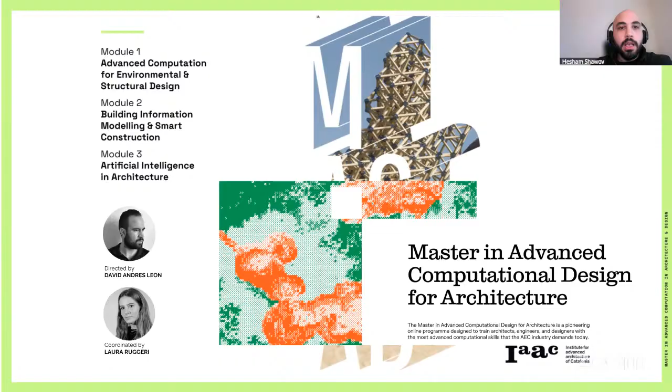Okay, about MACAD itself. So our seminar, the Complex Forming Seminar, is part of module 1 of MACAD. And there are 3 modules. The first module is focusing on advanced computation for environmental and structural design. The second module is focusing on building information modeling and smart construction. And the third module is focusing more on artificial intelligence. So I'm explaining this to you so you can understand where our course lies within the entire master's.

So our seminar is not the main studio. There is a main design studio where the students spend way more time, basically the full 8 weeks, to design the projects. However, in our case, because it's a supporting seminar, we spend the first 6 weeks with normal studies, taking assignments, but then the students spend the last 2 to 3 weeks developing these short projects. So that's something to keep in mind when giving feedback and looking at the projects, because they are very short term.

So this is where our seminar lies, and the other seminars in this module are the environmental and structural design theory, the digital tools for environmental analysis for architectural design, and the digital tools for structure optimization strategies, and our seminar, in addition to the studio, of course.

MACAD has a very interesting kind of format. There is the synchronous format and there is the asynchronous format, which means some of the students can actually attend the lectures in an asynchronous format, which means they only watch the recordings and they have separate live mentoring sessions to follow up on their progress.

So our seminar is focusing on Rhino, Grasshopper, and Python. So we try to introduce the students to computational design, the basics of computational design, focusing more on complex geometry, parametric design, and how they can actually document complex systems and computational design systems. Our sessions range from introduction to Python, mathematical surfaces, to form finding, to voxelization, to recursive geometries, swarming and noise, and also tessellation and tiling.

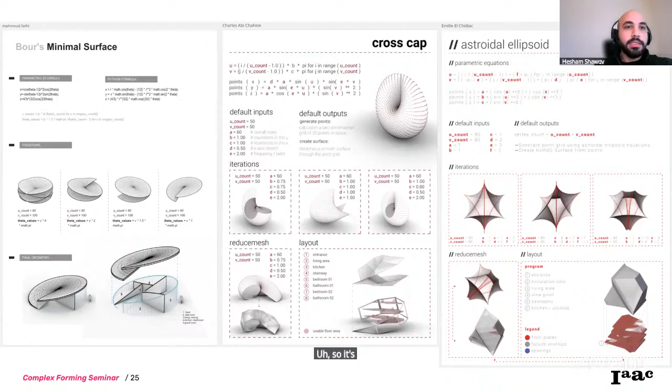So the first assignment is this one, which is the mathematical surface. So they actually study how they can build a mathematical surface using Python and Grasshopper, and how they can control the geometry in a way where they can use this as an envelope for a building typology like a house. And we work on a Miro board, so it's kind of an open format, everyone can see everybody else's work. So it's very interactive. And I'm just pulling a few examples. And I will also share an MVP, the best submission prize, for each assignment.

So for the first assignment, we had this great contribution from Charles, where he showed great control over the surface and also a very convincing method of converting this into a low poly geometry that could be used as an actual structure.

And moving to assignment number 2, focusing on playscapes and inspired by the playscape structure by Newhouse, and focusing more on form finding and tensile structures, where the students responded with their own work. So we give them more of an open brief, so they can respond in a more creative way to all these different parameters using the tools that we are teaching them on a weekly basis. And the MVP goes to Aditya for this assignment. Thanks for this as well.

He also showed how he could really control the attributes of these surfaces and the attributes of the mesh forces on many different levels, while also showing a great understanding of the documentation behind the process, which was really the main focus of the seminar, how you can actually document your process in the best way, regardless of the end product.

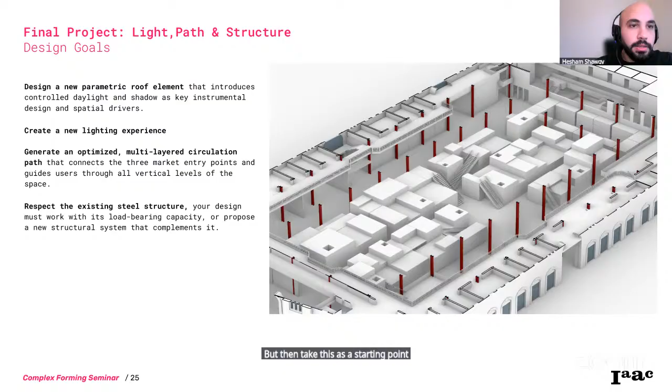So how they can design a new parametric roof element, how they can generate optimized multi-layered circulation paths, but also how they can respect the existing steel structure and the existing structure spans. As I mentioned, it's a very short project, so it's more about gathering their first impressions and their first responses as a computational design system to this existing building.

So if I look at this, I would say the main focus will be on the design system, the computational design methodology, the form finding process, and the design optioneering, more than, let's say, focusing on structure analysis, building materials, or optimization. So the last three domains are a little bit out of the scope, and they focus on structure analysis, for example, during other seminars within the masters. So this is also for our jury members to maybe set their expectations right when they look at all these different projects.

We have 24 presentations, so I'll try to wrap up this introduction now. Every student, it's an individual project. So every student will present their project for about 4 minutes, where they have around 9 to 12 slides. And we are going to have 6 clusters of 4 presentations. So we're going to run 4 presentations at a time, and then we're going to stop and open the window for the jury members to give their feedback for 10 to 15 minutes. Then we move to another one. So 6 groups of 4 presentations, followed by a 15-minute jury feedback.

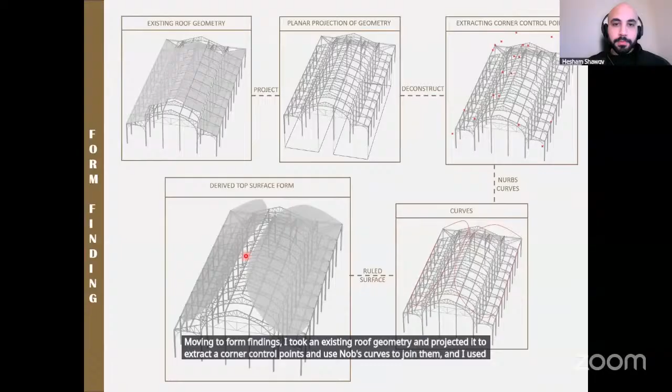the market. Moving to form finding, I took an existing roof geometry and projected it to extract corner control points and used NURBS curves to join them, and I used a ruled surface to derive the top surface form. For structural support, I took the derived surface form and extracted vertices out of it and then projected them to an existing structural roof and joined them using a pipe mesh to get a structural support for my derived surface. So here is the top layer and the bottom layer pattern.

So the top and bottom layers work together to filter sunlight, allowing soft natural light to enter while reducing the heat and creating a comfortable and dynamic shadow pattern inside the market.

So for my base roof layer, I took the corner points from the existing surface and converted them into a surface using 4-point surface and then converted into mesh using mesh surface and to tri-mesh and deconstructed it to get vertices for loading, and then used pull points to get supports at the corners, and then I used a bouncy solver to get the output mesh and then subdivided the mesh using a Weaverbird loop subdivision and then used a tangent circle to apply a pattern on it.

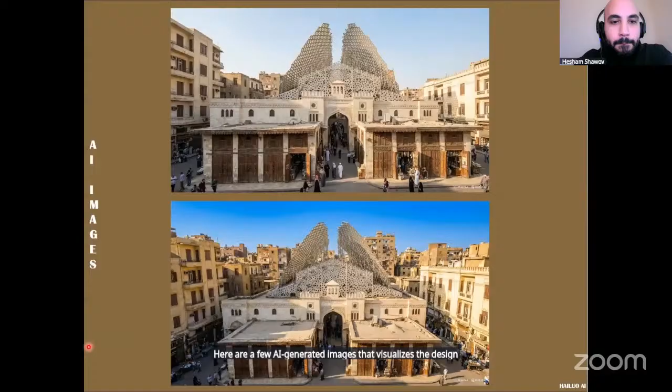So this shows that the design blends with the historic facade with a lightweight wing-like roof structure, creating a bright open public interior that transforms into an immersive illuminated courtyard at night. Here are a few AI-generated images that visualize the design in its real context. Here is a small walkthrough of my project.

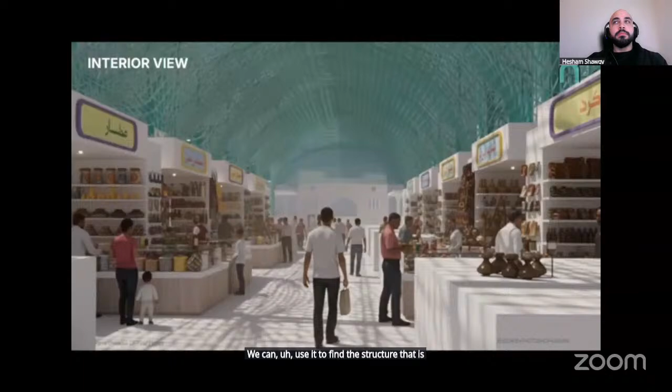So looking inside, the result is a bright, airy, and contemporary shopping experience. The new roof allows diffused light to flood the space, transforming the atmosphere. So the project demonstrates how computational design is not just about complex geometry, but we can also use it to find a structure that is both contemporary and sensitive to the existing classical architecture. We can protect the market's heritage while also securing its future as a vibrant, open, and inviting commercial heart for the community.

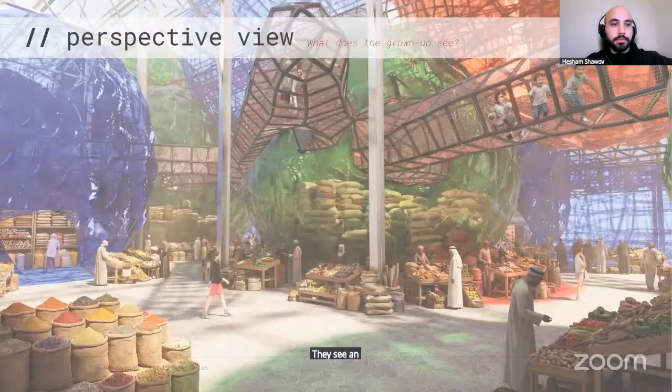At the urban scale, what does the bird see? It's a signal that something new is inflating inside the old shell. On the ground, what does the grown-up see? They see an atmospheric marketplace. The glitch becomes a lighting strategy. As the sun moves, the floor is painted with colored shadows. The most important question, what does the kid see? They see a wormhole. This is the spine. While the adults are shopping below, the kids are navigating a completely different world above. It's a hidden layer of the city just for them, suspended in a balloon network.

Finally, looking at the social logic, we didn't just place balloons randomly, we curated the flow. It organizes the chaos of the market into a functional ecosystem. So to wrap up, what do I want you to see? I want you to see a project that respects the void by filling it. It's balloons that hug the past and the people around.

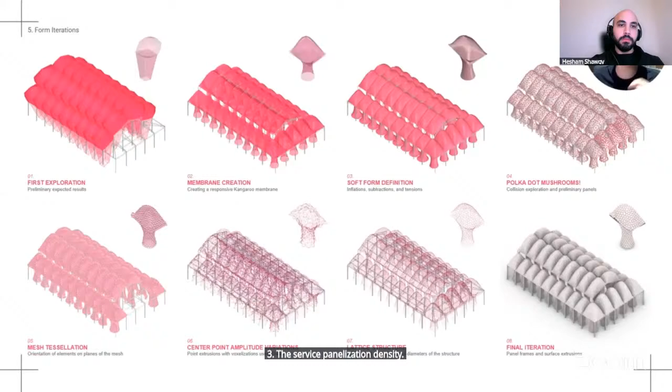The form-finding process was driven by a series of adjustable parameters, each one controlling four main aspects of the geometry. Number one, the structural descent of the columns. Two, the inflation of the upper domes. Three, the surface panelization density. And four, the inflation magnitude of the individual panels. Here you can see various iterations resulting from these parameters, taking into account key constraints and varying the final structural weights of the project.

In this way, the system revitalizes the decaying market. The intervention applies a new system directly into the pre-existing site, where the original structural grid serves as the foundation of the modern pneumatic transformation. From the exterior, the volumes appear as extrusions emerging from within, hinting at the commercial activities below. In the sections, we can observe corridors and shops nested within these extrusions, a design that allows diffuse light to penetrate deep into the space.

Here in the architectural plan, we can see that these volumes define internal organization, creating distinct commercial spaces and intuitive circulation paths. The upper faces inflate to provide shade and filter light, while the lower faces descend to sculpt intimate shop interiors. Ultimately, the pneumatic incrustation proves that we can revive neglected historical contexts not by replacing them, but by merging the rigid history with a new, soft, modular liveness.

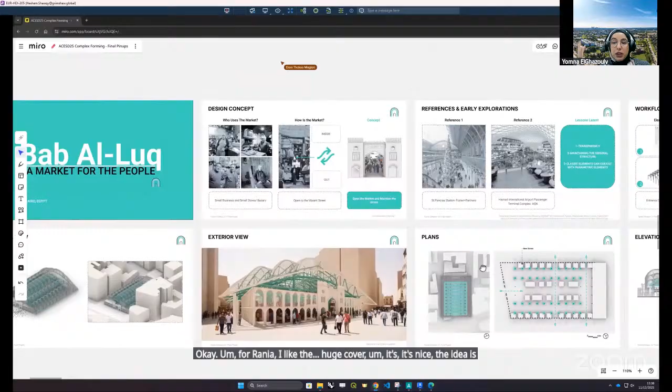Okay. For Rania, I like the huge cover. It's nice. The idea is nice. I appreciate the openness of it. However, I wonder if we could have made it more inspired by either the structure or the context, because I feel like there's a divide between the cover and those things. So I feel like the cover is a bit imposed on the form, but overall the form itself is very nice.

Emily, thank you for the project as well. It was very fun to see the different approach to that. And I like how you presented your process. It was very detailed. I wonder though if removing the whole building was the best approach. I would argue that maybe leaving specific elements in the building would have helped create this fluidity and void. I understand that she wanted to create an empty space, but maybe having these blobs intersect with the different elements would have been interesting, aside from the main structure, of course.

As for Ramon, I wonder if having these elements made the space less usable, because I feel like it took so much of the space. So as a further development to your process, maybe you could play a bit with the sizes and heights of your elements. That would create a more dynamic look to your design as well, and create more spaces. You'd be surprised by the in-between spaces that were created.

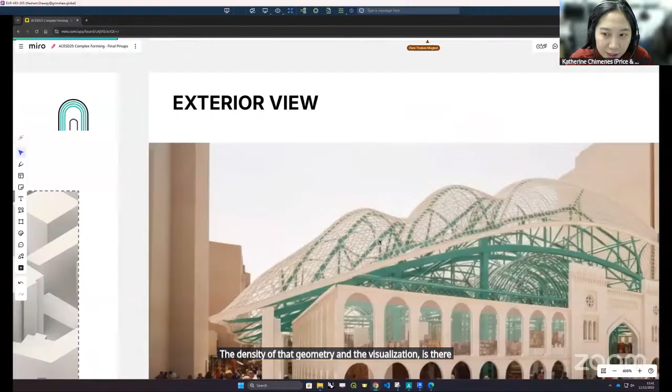Another thing as well is scale. In Rania's, for example, the tessellated shape in the renders looks like quite a tightly packed tessellated mesh. It would be interesting to understand the choice of that scale, how that responds to the density of that geometry and the visualization. Is there a potential for something less compact as well? Very often, structurally, we think about the connections. Connections mean lots more material. It's something worth revisiting. Also, the fact that there are two roofs for that proposal is a bit redundant because you have three shapes.

Also, very often with form-found, dynamically relaxed surfaces, so Rania and Sushmita, one thing that's quite interesting structurally is that these shapes, shell-formed, dynamically relaxed form-found shapes, can work very efficiently as shells independently. So they're inherently very good structurally. It's nice to think about how to make use of that and remove any secondary support structure. That would be quite nice to explore.

For Emily's one, I like the fun functionality of that proposal. I think it's very creative, the colors, the way of using a variety of computational design methods to actually create this structure. Actually, it reminds me of a Mona Hatoum sculpture where she has rebar cages with glass blobs, which is kind of nice.

One comment structurally is that you have these quadrilateral steel frames. Structurally, these quadrilateral shapes don't work as well because you often require stiffer connections. That's very often why, when you look at meshes in structure, you see triangulated meshes. It's about the inherent stability of not having to deal with connections taking moment forces. So it would help with your structure and potentially refine the size of the elements.

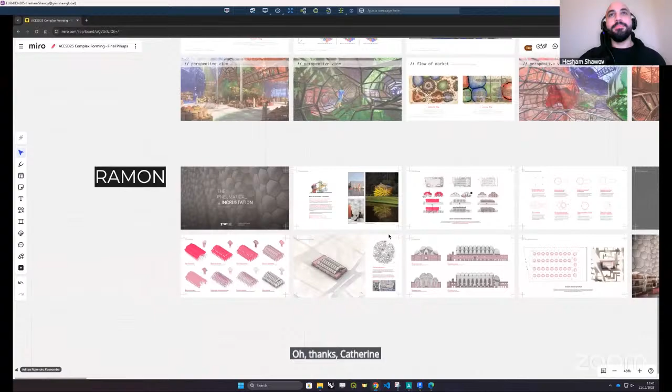Thanks, Katherine. Yeah, I think you covered a lot, both you and Yomna, but I would also like to hear if Anuj, Ines, and Ray would like to add anything. Yeah, maybe if I may, I will quickly jump in. Go for it, Andrew.

Thank you, Anush. Firstly, I want to comment quickly on the nature of the assignment, the brief. I think it's a very interesting one because it's one of the hardest things to design a harmonic dialogue between old and new. So repurposing and reconverting an old market like the Bab Al-Luq, I think it's a great design challenge and objective, and it's very easy for any designer to try to steal the show and erect this massive roof that doesn't respect the heritage and the history.

So I'm in Barcelona right now, and every morning I pass by Mercado Santa Caterina, which is a beautiful example of something similar, where you have a classical facade and actually a very similar structure of a market, but it has this incredible roof structure that goes over the top. These kinds of examples of architecture that have this dialogue of old and new are just really interesting to look at. I'll quickly go over some points.

The first presentation by Sushmita was very interesting. It made me think of another structure we have here in Barcelona by Frank Gehry, the whale. This is the kind of thing I was imagining with this shadow game from all the light bleeding through these little, I presume metal, some aluminum layers. Quite interesting. The second project I liked quite a lot. I especially love the fact that the truss and the facade have been preserved to some extent. I agree with Katherine that it does feel a bit bulky and seems almost unnecessary. However, I do like that it creates a ventilated tunnel.

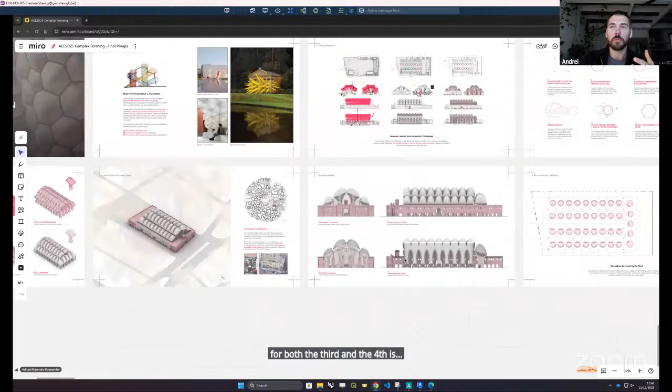Lastly, the fourth project, also very lovely. The comment I have for both the third and the fourth is that the whole thing, at least the way I understand pneumatic architecture, is to keep things light. But the way it feels here is that you're taking pneumatic architecture and making it so bulky that it occupies so much of the floor space.

And the floor space at a market is pivotal for any businessman, from economics to spatial syntax. I actually like the contrast that we've seen, because in the fourth one, Ramon shows very organized lanes of stalls, and that works in many ways for a market, and many markets historically are designed like this, where firstly this allows for ventilation to come through, and then you don't get lost.

With Emily, I feel, for example, with the population of these bubbles, firstly the market becomes a bit of a maze, which is tricky in itself to navigate through. And then a market is a space that is an internal shell, but the inside should be constantly changing or evolving over time. So this modularity to rearrange the stalls, to rearrange the businesses is important.

And this is where the less you allocate of a space for structural support for a roof, for example, the better. So that's just something to consider. But all projects are very interesting, and the logic of arriving to the form finding is also quite fascinating. I'm really enjoying your feedback.

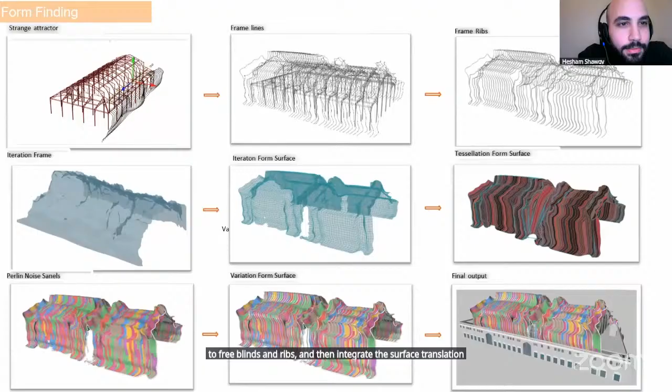Form finding: this shows from the strange attractor, frame to frame lines and the ribs, and then integrating the surface, tessellation, Perlin noise, the panel variation, the surface, and the colorful final output. It's about experimenting to evolve from rigid to organic geometry.

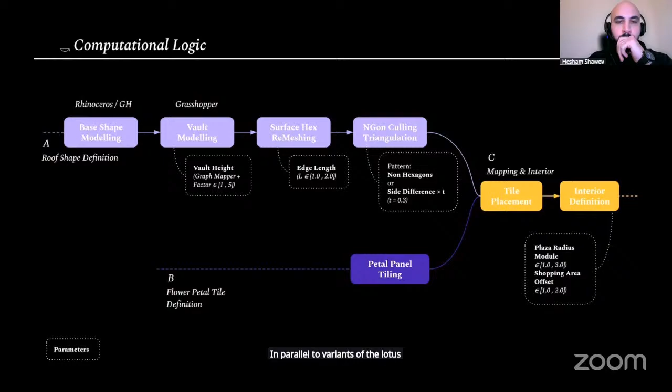From the computational perspective, the development follows three main steps. First, the simplified roof volume is modeled and used as the base for generating the lateral vaults. These vaults are then remeshed into a predominantly hexagonal mesh, onto which a triangulation logic is applied. In parallel, two variants of the lotus tile, one representing flowers and another representing leaves, are designed. These parallel processes meet in the placement stage, from which the logic for the interior pathways and layout is extracted.

Although the malkaf served as a conceptual anchor from the beginning, the roof shape evolved through several iterations before arriving at its final form. It began as flat planes derived from a standard malkaf profile, then shifted to rectangular openings, and later to catenary vaults generated through Kangaroo. Ultimately, the geometry was distilled into triangular vaults directly related to the structural modules of the existing market.

In this final iteration, the vaults are aligned with the structural grid and controlled by a consistent height factor. Their variation across the roof is managed through a graph mapper, allowing differentiation along the longitudinal axis. Additional structure is introduced along the vault edges and linked back to the existing trusses, and the surfaces are meshed with a target edge length to produce an n-gon-based mesh.

Once this base meshing is set, the lotus tiles are applied. A triangulation logic is used to determine where leaf tiles or flower tiles should be placed. Faces that are non-hexagonal, such as pentagons or heptagons, are triangulated, as are hexagons that exceed a user-defined tolerance for edge length irregularity. These triangular faces receive the leaf and stem tiles, while the remaining true hexagons host the flower tiles.

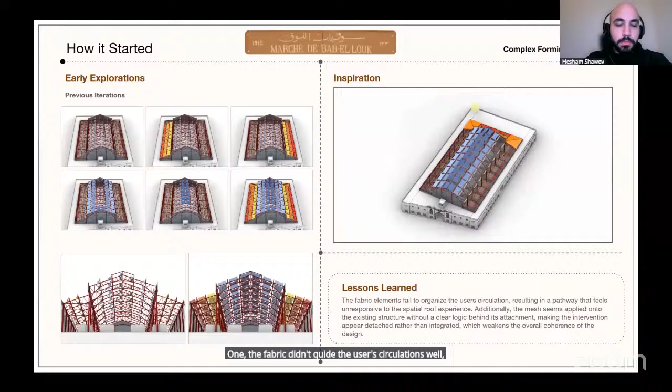In the beginning, I experimented with a tensile fabric that moved with the sun path, but I encountered two main issues. One, the fabric didn't guide the user's circulation well, and two, it felt a bit forced onto the existing structure rather than integrated. So I adjusted my approach, and here I'm going to talk about the computational design methodology.

I started by extracting the structure's outline and creating meshes. I defined load points influenced by a curved path, so the closer the points are, the more the mesh pulls downwards to guide circulation. Using Kangaroo for mesh relaxation, I got the final form. Then I applied color variation based on the Z direction, making the panels darker as they dipped lower, and used Weaverbird to echo the color patterns of traditional markets.

Finally, I arranged a series of shops and culled the ones touching the path using points and curve to open the circulation route.

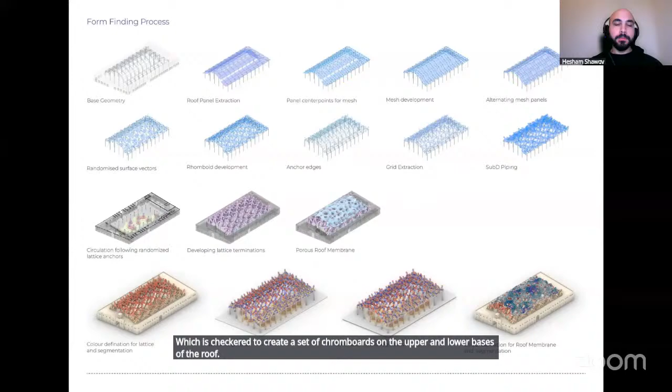The form-finding process uses the roof paneling extracted from given geometry using the centroids of the panel to build a separate mesh, which is checkered to create a set of rhomboids on the upper and lower faces of the roof. An extra set of randomized anchors are created to create a termination point both as ground anchors for vendor stall generation and separately as anchors for the roof membrane.

This is followed by SubD piping and inflating the final grid, which is segmented, then developed as strips, then colored following the positive Z direction. The next step involves using base geometry of the upper nodes to develop a mesh membrane with multiple randomization options, which is similarly developed as strips, colored with gradient variations, and processed to develop required porosity.

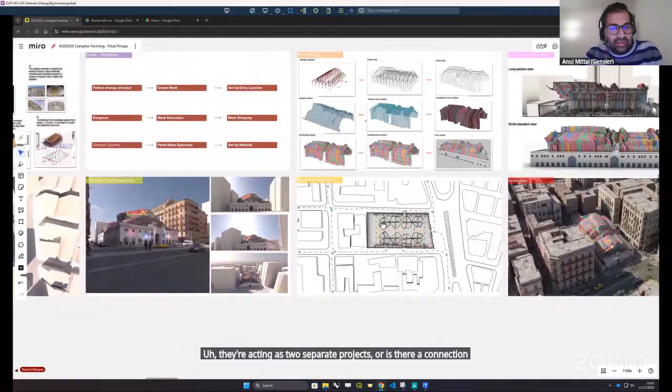And the other bit which I have a slight confusion with is what you're doing in the inside space and the outside space. Are they acting as two separate projects, or is there a connection between the inside and outside somehow? I love the colors, but I'm slightly skeptical of how they are connected to each other as well as the existing structure.

With the second project, I think that's Maria's project. I think I love the concept of using the catenary walls, and then the second bit, which is the pattern generation for the flowers and the leaves. I also love how it's very well developed, and you can see a lot of iterations that are done. And if I just talk about the computational strategies in place, I think it's a nicely developed project.

I especially love how you're able to articulate your flowers and leaves separately from hexagons to the n-gon meshes, and you're able to play with different strategies of patterns and how it reflects in the interior view. I think I loved that about this project.

For the next project, again, the concept of tensile and fabrics, I think I love it. I like that you are paying respect to the culture and how you want to adapt the colors and the hanging cloths, which I can see in your images as well. When you were explaining the project, somehow it struck me that you were trying something which I think is done by Studio Fuksas, how you would have these vortex coming in. I thought that's where it's going, but then it changed slightly into more about hanging the textiles.

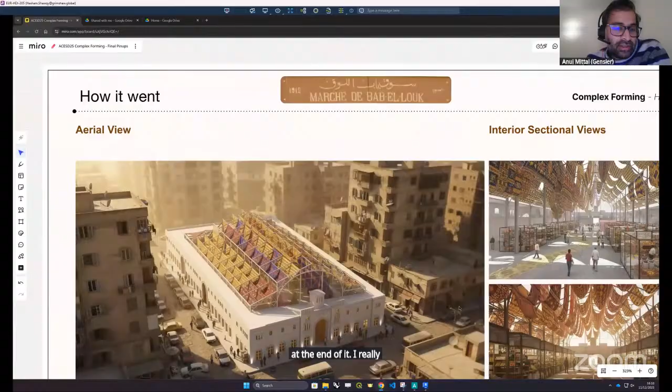So at least when you were trying to explain, my brain went in a different direction, and then the result was drastically different than what I was anticipating. I really appreciate that you were trying to do some shading analysis and figure out what's happening. My only question would be: are you doing these kind of simulations or analysis for the whole year? And is it responding to that? I mean, it's a complex topic, and I appreciate that the time's less, but just a few questions.

And then the last one, the balloons one. Again, I think I like the storytelling of the project and what was tried, and computationally speaking, it looks quite developed as well. The storytelling could be slightly better in this project, but computational technique-wise, I think it's nicely developed. And I love the fact that everybody's using AI, right? Because even in the professional world, it's taken over the world, so it's nice.

We try to limit the use of AI in coding because we use Python as well, as much as possible. So we try to at least make them use it as a tool that they can learn from, not as a copy paste sometimes. But anyway, it is what it is. At least we don't have AI voiceovers yet in the presentations.

So Ines, thanks so much, Anuj, for the feedback. Thank you. So thanks everyone for all the presentations, also the other four. It's crazy to think that this has been developed in 3 weeks and some of you were new to computational design, so congratulations to everyone. It has been great to go into all of them. I'll give a few comments on the first two, and if anyone of the jury feels like joining or adding something, please feel free to jump in.

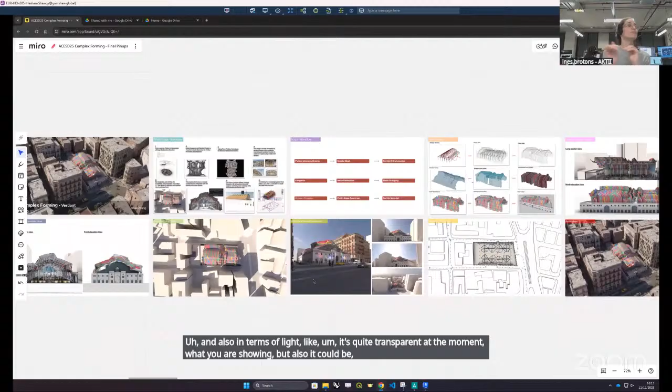And also in terms of light, it's quite transparent at the moment what you were showing, but some bits of the sections, or the transitions in between sections that are covered, could also be thought of as more translucent. I think that would be a bit more of a game or interaction with what's going on inside. But overall, as a logic and application, I think it respects the existing a lot, and I enjoyed it a lot. So congratulations.

If we go to the second project of Maria. So first, congratulations for the neat and clean explanation, workflow and articulation of the project. And again, crazy to think that this has been developed in 3 weeks. So that was very easy to follow, and as said, very neat.

If we could continue this project, I'd be very curious about taking a step further once you have your tiles and your tessellation, which is a great job in the last iteration, where you see that the roof shape is almost some flat surfaces joined together. Then there's an opportunity of trying to implement a single standard sizing of tiles. That would be amazing to think about.

Could we describe this roof, given that it's a set of flat surfaces that are joined, as we've been doing years and years ago, having just 3 or 4 types and then creating amazing patterns and shapes? Could that happen in terms of fabrication or simplification? That's a question I'm throwing here, and it will be quite complex, but it could be very nice as a further exploration.

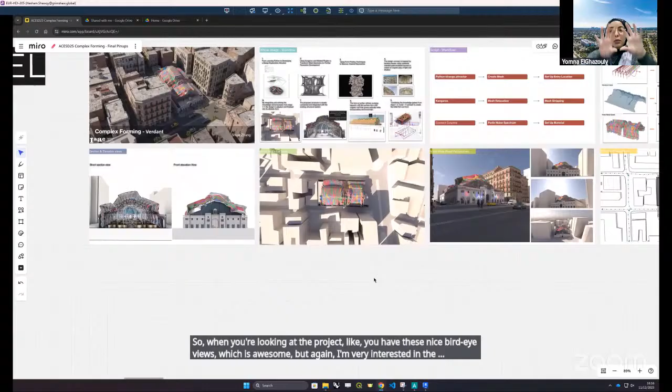So for the first project, thank you, Daniel. It was a very nice inspiration. However, I have 2 comments. When you're looking at the project, you have these nice bird's eye views, which is awesome. But I'm very interested in the experience when you go a bit down, because the area around the market is very, very tight. So you cannot actually experience this fluidity of the project.

So I feel like you meant to have a free roof, yet you ended up being confined by the edges, and you had to have a specific viewpoint to experience the whole thing. If you want to expand it more, maybe you should play around with the structure, take things out of their confined space, to make sure that from different points you can actually experience these angles. So that's nice.

Maria, thank you for your nice and clean project. My comment is: nice, clean, needs a bit more aggression, I would say. I feel like your project is a bit on the conservative side. You could have experimented more, especially since in your first iterations there were things intersecting with the main structure, and these masses could have been more aggressive and you could have played more with them.

And I would say mind the resultant silhouette, because there's an image where you can see the front, and then the silhouette, and the silhouette looks distorted. So it's more like distortion rather than masses playing together. For the third project, Henny, thank you for the lightness of the project. I really appreciate that.

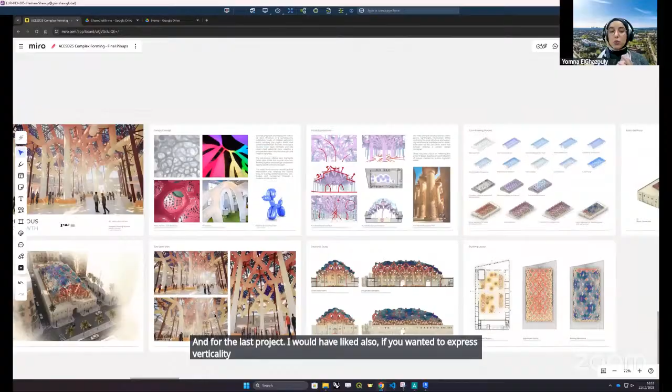And for the last project, you wanted to express verticality. So I would suggest, how about you play with perspective as well? Maybe making things more slender as you go, so you would actually focus more on the verticality of the space. Because if we experienced it with the human eye, it wouldn't be as grandiose as you think. But overall, awesome projects, you guys.

Thank you. Amazing, Yomna. Andre, Catherine, would you like to add anything? We still have 2 minutes. I'm happy to go. Yeah, go ahead.

So with Daniel's, I actually quite liked it from the design control aspect, because it was the right balance between following the rhythm of the existing structure, but adding something a bit different. What I liked is that it felt really thought through, your idea and your shape, that you had a vision and tried to find the right tools to replicate it. Very often in parametric design, the issue I have is that you see the tool by looking at the product, whereas here it feels like the idea came first, the draping and the shape, and then you used the tools to create that. So I quite like that aspect.

And structurally, it makes sense how you would attach it to the existing trusses with those arms. Sure, it needs some refinement structurally, but from a rationale, the way you've connected them to where you have the posts from the trusses makes a lot of sense. So I think it's actually quite a nice thing. There's of course some refinement to be done on the interfacing and how it interacts at the edges of the buildings, but I quite like what you've produced there.

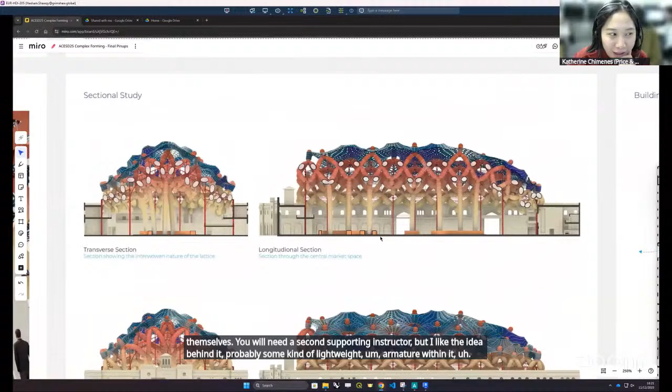Okay. And Aditya, sadly, your inflatable columns will not be able to stand by themselves. You would need a second supporting structure. But I like the idea behind it. Probably some kind of lightweight armature within it, like a steel and aluminum frame, would help it work. You have to have that as a self-supporting structure, and you have to think about air and how to keep it in.

I'll leave it to Andre. Actually, it's interesting in this project because you can think that the roof is actually the structure carrying the columns, right? Because the roof is supported on the existing structure, so maybe it's the other way around in this case. Exactly. Because of the geometry of the roof, you might hang the inflatables, fake them as columns. Instead of inflatables, they would just be fabric, tensioned to create the shapes you want. They'd be fake columns, but that would work, and they're very lightweight, so that's quite interesting to explore.

It's the first time for us as well to see so many things today, so I'm kind of jealous that I can't participate as much. But Andre, final comments. 1 minute, sorry. I mean, we're 2 minutes behind, so I think everything has been said.

Great projects. I think strong computational development. Some of them are very wild, like Aditya. You slapped a kraken on top of a market.

An important point that has been raised earlier is the ventilation, and this is something that's due to the material and the structural nature we are not focusing on, but it's just something to consider because in a hot place like Cairo, the heat is going to bring up all the smell upwards, and it needs some place to escape. And materiality is another factor that we're not focusing on, but it's also quite important to consider.

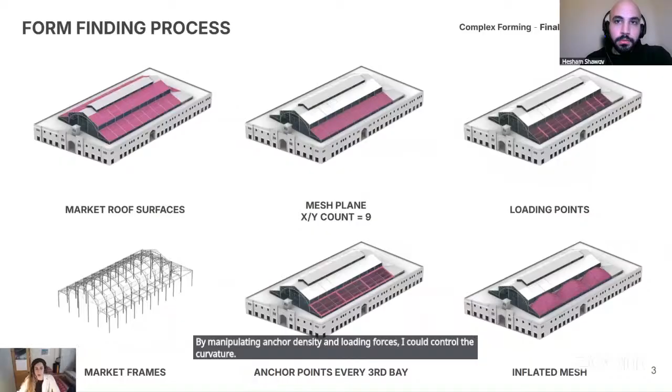Using Grasshopper, I built a workflow where a flat mesh is inflated and anchored along specific bays. Then the mesh is triangulated in the post-processing. Then, finally, I created a system for open versus closed mesh panels to control the light inside the market. By manipulating anchor density and loading forces, I could control the curvature. This workflow allowed the form to evolve naturally based on both structural and daylight intentions, which became the main influence in the project.

Through several iterations, I compared different meshes as well as void and solid panel configurations. Each option produced different patterns of light and shadow inside the market. Here we can see how the new roof system sits within the existing steel frames. The exploded view illustrates the relationship between old and new. The new pipe structure follows the curvature of the roof, and each pipe connects back to the existing steel frames through a secondary network of smaller connector pipes.

To understand how the roof performs throughout the day, I studied the sunlight from 6 a.m. to 6 p.m. The results show clear patterns. The east side is brightest in the morning, the center dominant at noon, and the west side lightens up in the afternoon. These changing conditions became the key generator for the internal zoning and circulation strategy.

Based on the sunlight behavior, in the morning, the east side receives strong direct light, which is ideal for produce, flowers, and breakfast-related vendors. At noon, the central spine becomes the brightest area, so I placed more active, high-visibility programs there, such as prepared food and artisan stalls. In the afternoon, the west warms up with a slower, softer light, which suits textile, ceramics, and other things. Circulation naturally follows these lighting shifts. People tend to move towards the brightest zone at each moment of the day, creating a continuous loop through the market.

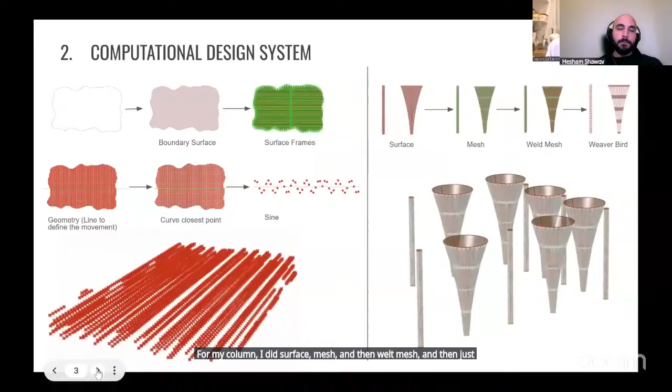My idea is to create a parametric canopy that will support a sine curve or a honeycomb waffle wooden panels to lure the light inside the structure. And for my first computational design system, as I did my sine roof, I created a boundary surface and then did surface frames, create a geometry line to define the movement, and then curve closest point, and then do the sine graph, and then extrude it, X, unit Z, and then for my column, I did surface, mesh, and then weld mesh, and then just Weaverbird, a simple geometry.

This is my first form finding iteration. I realized that the roof and the columns don't really connect, and I lose a lot of control over the sine wave logic. And then there is weird ending and weird opening that was created, and there is no connection between the integrated structure with the existing structure that I'm having now. So, and also this roof doesn't show how it connects and how it will work realistically. That's when I did another form finding process that leads to my final design of the canopy.

So I found this because of the lecture that Hesham showed how we use our geometry and then project it into the structure that we want. So I'm using here hexagon and then cull index, creating an opening and then project it onto my geometry. So this is the exploded diagram of how it will support the sine curved roof panels with slot and connections, and then structural waffle grid canopy, and then the parametric canopy that will support it.

And then I placed the canopy together so it can support my sine roof structure, but then I haven't worked on that, so it still has no control over ending and connecting points. And the new structure, it's weirdly higher than the existing structure, and it's not considering the overall context. That's when I did another form finding process and finalized my sine curved roof panels.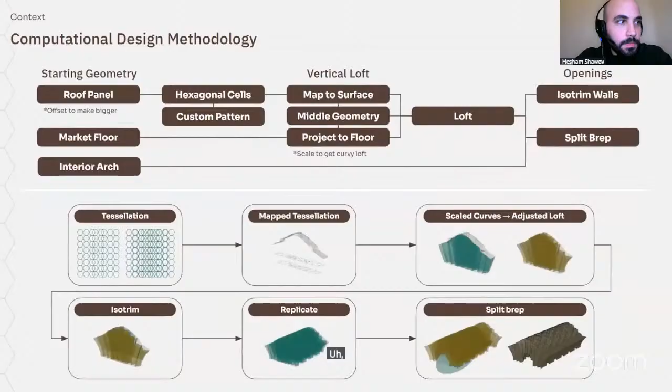And then in phase 3, I started developing a tessellated pattern system through loft workflow and Boolean operations. Thinking of it in parts, I found that one partition of the structure can be replicated to minimize calculation times. And from there are 3 main parts of the workflow: the tessellation, the loft, and adding the openings through isotrims and B-rep splits. For the tessellation, I tried repeating polygons, which looked a little too much, so I quickly decided to go with hexagons, and then scaling and duplicating to achieve those unique intersections.

The loft process was also really fun. Mapping the tessellation onto the roof, then lofting gives interesting lofts when each part is scaled. And then, of course, I was able to subtract with another form for the main entrance. I decided to go with a shape derived from the original structure's arch. Here are some iterations where I looked for a shape that is balanced and allowed for workable spaces. And from there, we see how at the ground floor, the hexagons offer ample space for vendor stalls.

Hexagonal grid organizes the vendor stalls and circulation, channeling visitors through compressed entrances before releasing them into the central gathering space. The section reveals the vertical journey with tessellated structures creating varying enclosure levels and central voids acting as light wells and ventilation chimneys. These views capture the experience of intimate shopping and filtered light, transitioning to dramatic vertical spaces that provide relief and orientation.

And so the Faraj Bajida market transforms throughout the day with shifting light patterns, animating the courtyards and creating unique experiences from morning to evening with the promise of relief after hardship. Thank you.

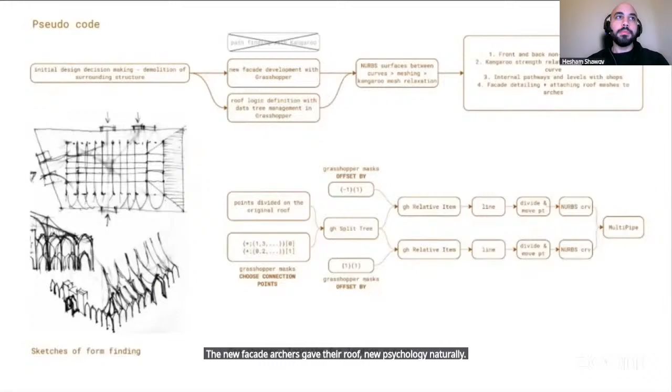In terms of the computational logic, I looked into masks in Grasshopper as the fastest way of managing multiple complicated curves connections. Here is a step-by-step form finding on one of the modular bays. Using the guiding horizontal lines along the existing structure, they were divided into the number of points which matches with the structure itself. By using split tree with masks to choose which point to connect to which, then offsetting point connections vertically with relative item, the lines are formed between the chosen vertices and are then turned into NURBS curves for greater control. The lines are then lofted horizontally and loft surfaces divided and joined vertically instead.

Then on the vertical surfaces mesh relaxation was applied. The strength of how much the mesh is relaxed depends on its proximity to the pathways on the ground floor. Lastly, the roof is added on top to cover the space from above. The relaxed meshes are hung to the bottom of existing structure, while the lofted surfaces are sitting on top of it to protect it from elements. This way, a series of interchanging checkerboard-like meshes is produced, which creates an interesting effect, impacting the light and shadows in a unique way, but still keeping the existing structure visible.

Here on the following slides, we'll see the floor plans of the ground floor, first floor, and the roof. The main takeaways of this project are the importance of proper mesh optimization and how strongly it influences the final geometry, the need to resolve internal spatial logic more, including levels, stairs, and circulation, and strategies for making non-typical geometries more parametrically manageable and adaptable. And on the last slide, you see some Twinmotion light studies together with Nano Banana Leonardo AI image showing the whole market and its surroundings.

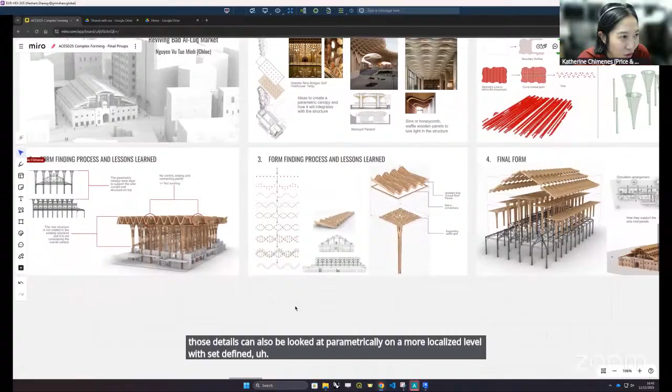And I think those details can also be looked at parametrically at a more localized level with set defined boundary constraints. So if you have interesting constraints that you want to inform differently, you can also come up with quite interesting different connection details, or alternatively find a way to tackle both structures jointly. So having that holistic approach of trying to solve geometry is also important in that sense.

If we go back to the other projects, I think Eleni's one was quite nice with the shape. It's like a tensile membrane, which is very lightweight and usually quite interesting structurally. So you have a very coherent structural approach here, and that would work quite nicely and respond as well to the grid of the trusses.

We then have Chloe and then Lakshmi and then Marina at the end. Great, thanks. I'm sharing my screen, by the way, if you didn't notice. Yeah. So for Marina's one, I think it's also very nicely done. The surface is porous and like a mesh. It would be interesting to think about how to have something more solid to make use of that curvature, because once again, curves are really good as inherent structural shells.

So by doing that, you can think about how that could integrate, but at the same time, you have a different purpose here in terms of what you're trying to create with the shading and the fabric. I quite like how your frame responds to it. So it's a matter of wondering if you want to have the inherent shading structure and the structure that holds itself up, or you want to separate it out into components. But I think I'll let other people comment on the other works.

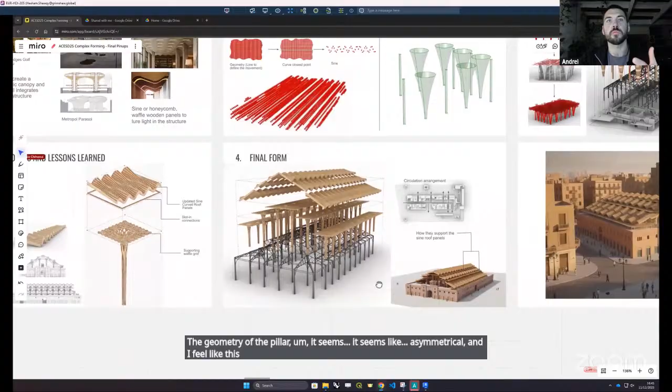asymmetrical, and I feel like this is where symmetry would work very nicely, because you were following this sort of Calatrava superpositioning of elements, which I love. So I would have loved to see that. I love also your decision to get inspired by the Ruffles chips. Anytime you have corrugated roofing, it just works well for rain or for any other runoff to go off.

And I also like this project and the first one, because they are explorations of roofs essentially. The first one, actually, I really want to come back and just clarify something. I really enjoyed the circulation of light explanation. However, I'm a bit confused by the types of shops and the times of the day. Like, did you have in mind that the shops change throughout the day? I wasn't really clear on that. Say the fruits in the morning and the clothing in the afternoon.

Can I respond? Sorry. Yeah, of course you can.

Yeah, the idea is to have morning related, as I said, vegetables and fruits in the morning, and when the light gets warmer, the ceramics and textiles throughout the afternoon to have warmer light on it. Okay, but would the vendors be rotating? No, there would always be a location. I think the purpose of this study is to have clusters of different zones which can inform how to relocate or create the positions for the different types of vendors or shops under the roof. Understood. Thank you for clearing that up.

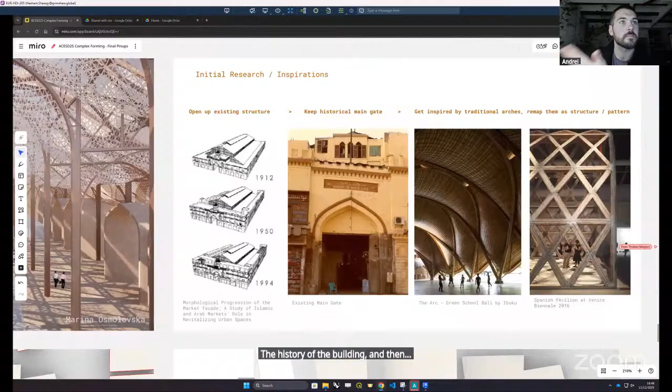The last project of Marina, I really like, firstly, that you showed us the history of the building, the way it looked in 1912, 1950, 1994. That gave me a lot more understanding of the history of the building. And it's an important thing to consider what you're taking out and what you're keeping. I also like your meshing system.

I'm just gonna say that those nets are a double-edged sword because they look lovely, but it's the perfect thing to trap a dead bird, and that's something we must be considering because birds and pigeons are the number one terrorists at any market of that size in the city. So this is just something to keep in mind, how the roof is gonna take life over time. Very interesting projects. Congratulations, Tiger.

Thanks, Andrei. Thanks so much. Ness, would you like to go next? Thank you. So thank you for all the presentations.

I'd like to highlight from Eleni's project. I enjoyed the fact that the computational design of the roof was led by the functionality, matching how light interacts with the functionality of the market within the design. That is very nice, and also the graphics and explanation were very clear.

I would wonder, because with the same computational design method or the bulbs that are generated, we are having different patterns in terms of transparency and opacity, so that it gives different outputs in the interior. It may be also interesting to explore this in terms of shape, to take it one step farther in terms of geometry, because the geometry may also give interesting lighting results, so that it doesn't seem like repetition. Overall, I enjoyed it very much, and as some of the other judges were mentioning, it's thought out in a way that works very well with the structure, and that will be very neat to make it work nicely.

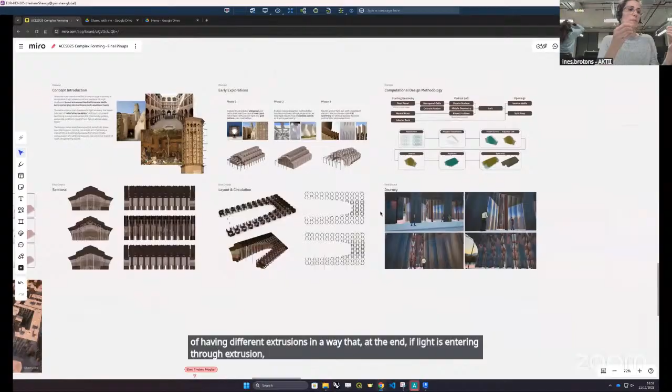And yeah, then for the third one, I think it's very interesting, the idea of having different extrusions, in a way that at the end, if light is entering through the extrusions and the extrusions are different in terms of depth, it can give a very interesting result of light in the interior, as you're showing in some of your renders. I think that's a very powerful idea of different modules that are touching each other but have different depth.

There's an opportunity of working a bit more on the base, as some of the jury was mentioning as well, so that it is not that invasive with whatever program could be in the market. As an idea of roof generation following a rigid pattern that also somehow adjusts to the existing grid, it's a very good approach, and I enjoyed very much the overall project.

And lastly, the last one, I think it was very interesting to see for the first time, of the projects, that we are zooming in on a module, given that the existing is a market that is very repetitive and that has a very strong logic structurally wise. I think it's very interesting to focus on a module, understand it purely, and then extrapolate that same concept to the rest.

Potentially, this computational method, adding some additional constraints, may lead to even different geometrical results that may respond to other necessities of the market, again ventilation, light, but as an overall approach, understanding and being very clear with how this module is resolved, although it may have iterations according to different constraints. That could be a next step. It's very clean and nice as a logic, and if it were taken to further steps, that will help a lot to keep this modularity.

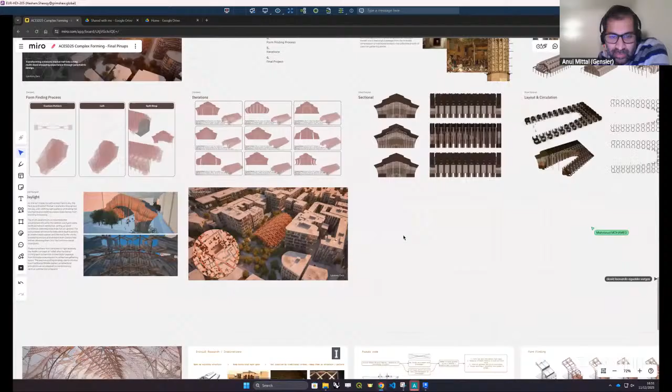But the third one, I find it interesting that you stuck to the concept from beginning to end and explored all the possibilities computationally that were available to you, and you didn't give up on it. I liked as well that you tried a few different geometry infill patterns, and the only comment I had was the culling or splitting bit that you were doing, the Brep split at the end. Maybe that could have more articulation. It could have been better informed by what was happening inside.

And then the last one, I think the time's up, but I'm just gonna take half a minute more.

And the last one, Marina, I really love the fact that you opened up the edge walls and tried to kind of connect the existing structure with your, like especially if you go to the fourth slide and zoom in, how you connect the edges, the portals that you're creating with the existing structure. I think that's amazing.

Just a quick comment for every student who's trying the textiles and the hanging and the fabric. I don't know, maybe Catherine would be the right person to talk about this, but wind loads, I don't know how that's going to happen. What's going to happen with that? Think about wind in the future. But as a computational exercise, I think it's amazing.

Loved it. Thank you. Just maybe a small note on this project by Lakshmi, the third one. I think there's a missing layer here, which is the materiality of all the surfaces. Because I agree it's bulk, but of course if there was more time, I think she would definitely jump into how she can represent all these surfaces with a light material that can also respect the original structure in a way. But I think there's a major missing layer in that exercise.

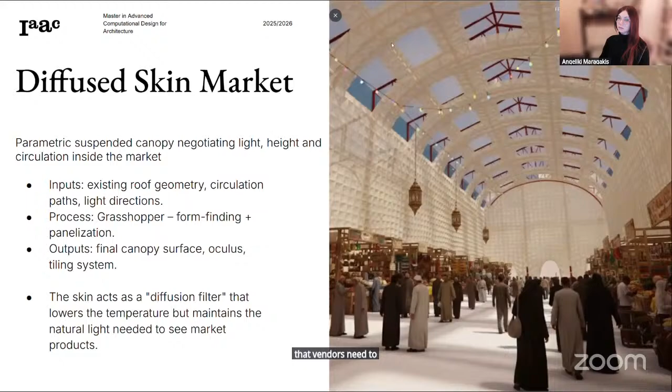So I went back to Grasshopper to build a smart logic. I start with the basics, the inputs. I took the existing roof geometry and paths where people actually walk. Instead of forcing a shape, I generate a grid on the XY plane and project specific anchor points. The idea was to ensure that whatever I designed would sit perfectly on the old iron structure, respecting the heritage of the building rather than competing with it.

This is where the fun part begins. I use Kangaroo to simulate gravity. Think of it like a fabric. I let the mesh relax and fall naturally, but I didn't want random columns. I used a weight points strategy to pull the mesh down only where there is empty space for walking. The result is the organic arcs. Regarding the construction,

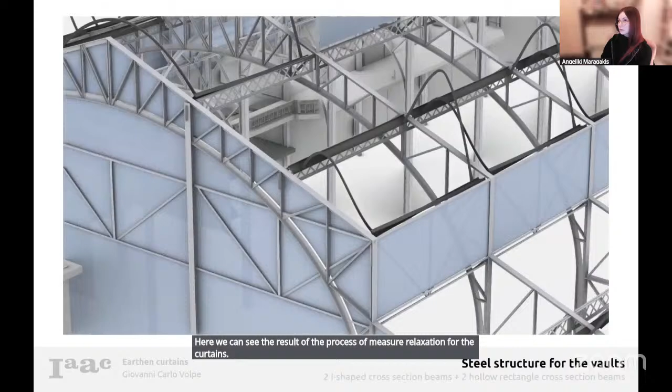Here we can see the result of the process of mesh relaxation for the curtains. Here we can see the steel structure for the vaults, which is composed of 2 I-shaped cross-section beams plus 2 hollow rectangular cross-section beams, which follow the curvature of the surfaces. And here we can appreciate the roof module with the mini vault composed of 3D printed brick elements.

In order to find the distances between the interlocking bricks, I decided to evaluate the average incident radiation on each of the mini vaults. The day chosen for the analysis is the 21st of June, because it's one of the hottest days in the summer. I also chose to evaluate only from 9 a.m. in the morning to 4 p.m. in the evening, because at other times the other buildings cast shade on the market.

Here we can see how the form finding works. When the average incident radiation of the mini vault is lower, the distance between the interlocking bricks is higher.

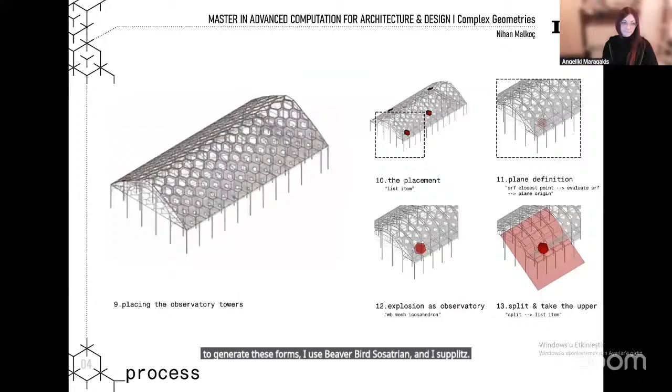So to do that, some of the surface panels were selected and transformed into icosahedron-based volumes, which then evolved into these vertical elements. To generate these forms, I used Weaverbird mesh icosahedron, and I split the mesh and selected the upper parts. I performed the form finding process using Kangaroo. My main goals were pressure, edge lengths, and anchor points. The naked points were defined as anchors, and hexagonal cell points were used as target points. After that, I refined the geometry by applying scaling and movement along the specific axis based on visual directions I wanted to emphasize.

So I also thought about that, and I added diagonal bracing between the existing structure and the new panelization. The panels are designed as recycled fiberglass, while the transparent ones are glass panels. The main structural system is a steel structure, which allows both structural stability and visual lightness. So the light that enters through these openings creates a dynamic lighting effect inside the space. This allows the project to change its atmosphere throughout the day, and strengthens the relationship between structure, light, and movement.

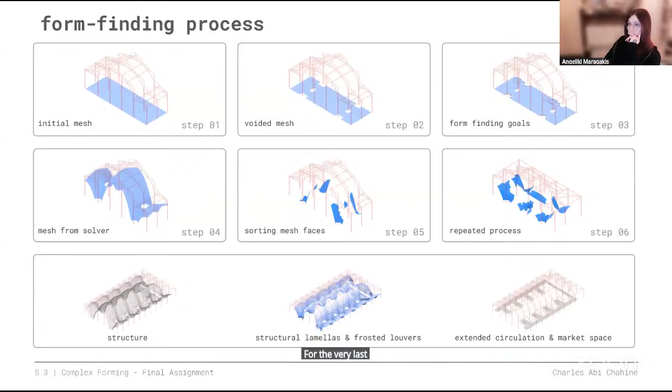The sedimented layers create a filtered light environment perfect for a market. The horizontal elements of the mesh serve as display shelves for goods and circulation paths, integrating the program directly into the structure. The result is a complex form that is both structural and functional, an intervention that respects Cairo's history while introducing a new luminous layer of activity.

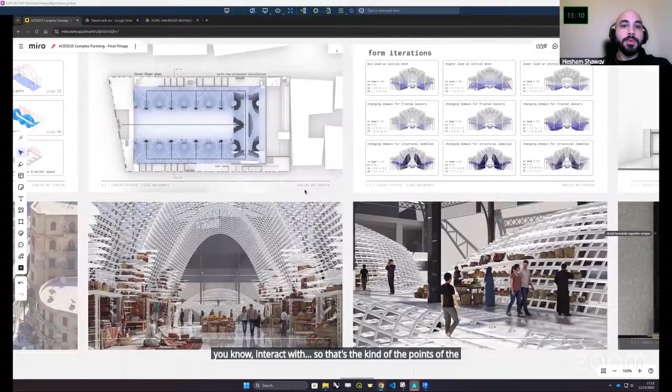Got it. Was that for potential future development or something? I think this is what these shots are trying to represent. Okay. And also, I like the fact that you're using the structure that you're creating as shelves for the marketplace. I think that's quite nice as well.

With the third project, with Nihan, I quite like the fact that you tried something different and created observatory towers as additions to the market. Just throwing ideas, maybe you could have used the placement of the observatory towers as something that can bring light in where needed, because you already have some openings in your roof bringing light in, and then you have these places with observatory towers. Maybe you could have combined them, with a logic that dictates one to the other. But overall, great work there as well.

With Giovanni's, I love the fact that you tried the Nubian vault and the Catalan vault.

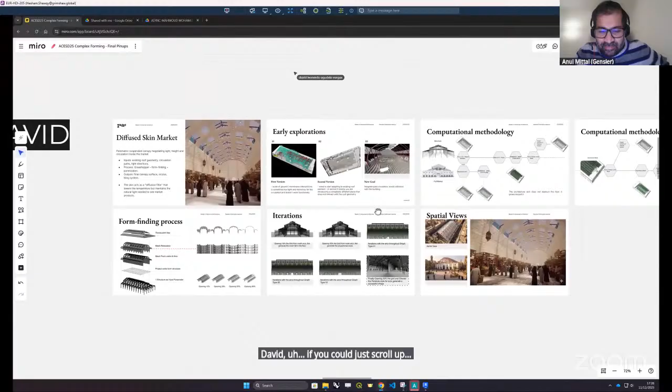And then the first one, David, if you could just scroll up. Yeah, the mesh relaxation again here. I think that's quite interesting. I think it's a bit similar to, I think we've seen a few of these now. And I like the fact that you again explained the process, how you changed it, how you developed things differently. And yeah, I like the renders as well. I'll give the other juries some extra time then.

Thanks, Anul. Yeah, I think at some point as well, we explored this idea of topological interlocking and how you can actually carry a geometry like this using the structure friction between the modular elements that you're using to actually tessellate like a shell, which is kind of interesting to see how this works versus the beams as well.

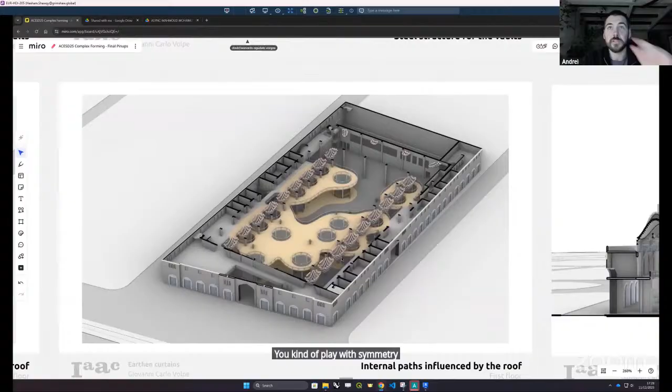The only thing is, I'm not sure why you chose to explore the ground floor and the relation that it has to it, because you have such a symmetrical flow of these arched vaults that face one direction, and they continue to do so. But then if you look on the inside, you have this blobby floor plan, which I'm not sure how it relates to either the outside of the building or the roof geometry that you've been developing. I mean, of course, you have the dips, the curves, but you kind of play with symmetry and then with lack of it in a way that I think can be slightly more harmonious.

The third project by Nihan was quite interesting also. To be honest, you had me more up until those parasitic structures, because I was looking at your roof and I tend to favor slightly simpler forms and shapes, and I think just your exploration of the hexagonal patterns and opening makes sense. But then you adding those observatory towers, it's a ballsy move. Many appreciate these parasitic architectural elements, but yeah, you just gotta be very delicate about these things.

Finally, with Charles, I quite like this, and this makes a lot of sense actually. If we come back to talking about acoustical properties, you creating these different chambers and sort of breaking it up, and also playing with concave shapes, makes a lot of sense, because you give order and structure to the function of the market, which is nice, and you maintain the outside, which I really appreciate, because the market in itself is beautiful, and I think you've integrated both your computational exploration and the form very harmoniously. Thank you. Thanks so much, Andrei.

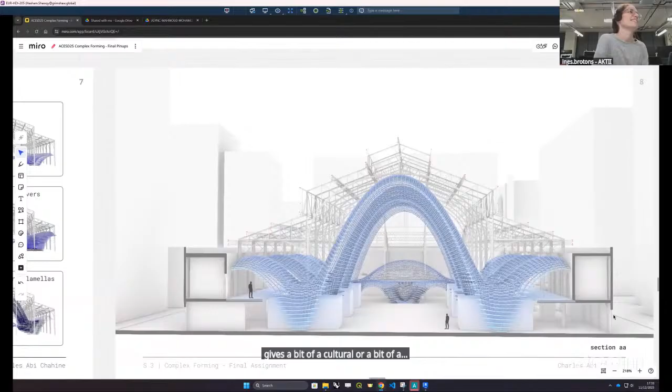And then as a third general comment, I'll say the discussions in between when you're dealing with an existing structure: you can either be embedded and work very well with it and get very well integrated, or decide to split apart and be very respectful, as respectful in a way that you don't even touch it, in a way that also gives a bit of a culture, or lights up a bit the essence of the existing, which I think is also interesting in the image that we are seeing now, for instance, and also in David's project. So yeah, that would be my comments.

Thanks, Ines. Yumna, you raised your hand earlier. Yeah, so I have a comment for everyone. Continuing on Anul's comment about how we study environmental analysis, I noticed that everyone, and it's very common even in professional architecture, when we're studying environmental analysis, we just forget about the surrounding buildings, and we end up seeing the building on a plot and everything is empty around it. It's so clean. So when we're studying the shadows and stuff, it's all in nice fabric.

I feel like this is something that you have to keep in mind, because if you're studying environmental analysis for the sake of creating patterns on the floors, these huge buildings around you would block everything that you need. You might even need reflectors to increase the light that you have inside. So I feel like this is something that you need to focus on more. But that's the major comment, I think. Yeah, I just brought this image because it shows the phenomena that you're also talking about here, Yumna, which is very valid. Katherine?

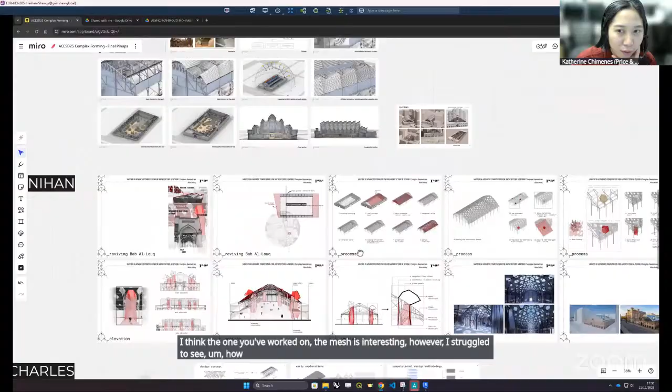If we look at some other ones, I think the one you've worked on, Nihan, the mesh is interesting. However, I struggle to see how it would be supported below, because it looks like a very thin fabric with lots of holes. So you would have a secondary frame supporting it that would be quite chunky, especially because you have quite large perforations. It looks more like a cladding than an inherent structural system.

Charles, I was intrigued by your form iterations plot and how you were talking about carrying out an analysis, a comparison between structural integrity and allowing the light to go through the porosity. One thing that I would say from what you've shown, because you have these arches, I would see a sort of hierarchy in the way you shaped it, even though you have a kind of shell.

Either you would have a shell, and then it would be a bit more complicated to analyze it structurally. So I'm just intrigued as to how you approach that. Or alternatively, because of its shape, you would also potentially have primary arches that would go into the page, sort of parallel to the longer direction axis of a building, and then have lighter, thinner rafters act as secondaries.

So it's something that I can see naturally occurring here. However, I do like how you've integrated your mesh with how you're supporting elements in the market. It's quite a nice touch.

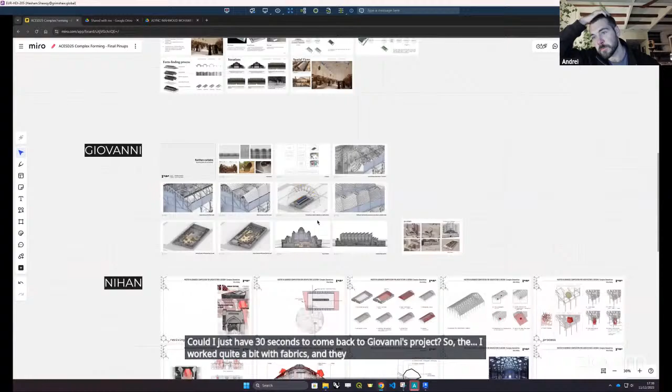Andrei? Could I just have 30 seconds to come back to Giovanni's project? So yeah, definitely. I worked quite a bit with fabrics, and they look great in renders, but in reality they look very different. The arches that are not the catenary arches that are standing up, you only have one steel arc at the beginning and one at the end. You would need one probably every 5 centimeters, or you would need some sort of rigging line between the 2 points. For fabrics to be held in a certain form, you need so much support, so much framework. So that's just something I'm adding.

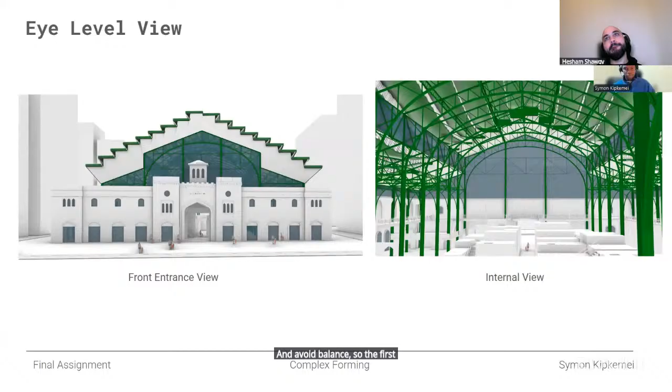Then finally, this is a form study on how you'll view the space from outside. So the same balance that was achieved on the roof is the same balance that we have on the facade, having sort of a solid and a void balance. So the first layer is mostly solid, punctuated with openings, but that also applies to the second layer, which is the roof. We have the solid that separates the roof and the glazing beneath it. Same applies to the internal view.

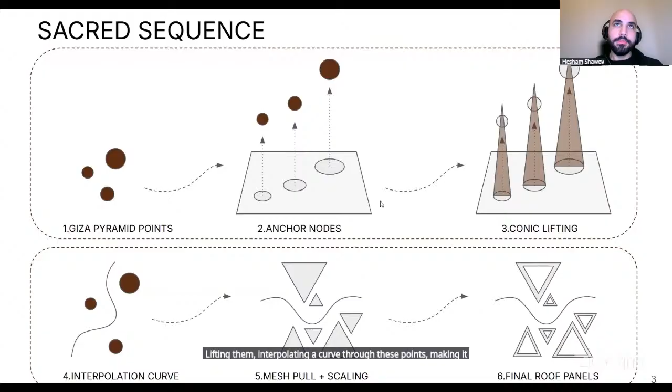The morphology starts by extracting the 3 pyramid coordinates and treating them as anchor nodes, lifting them, interpolating a curve through these points, making it the main factor in scaling and light ambience. And the same goes for the market: with the same curve, the pathway of the market and journey is set.

Form discovery. From these nodes, I perform conic lifting using Kangaroo physics. Each point is surrounded by circles of different radii. These circles act as target points that pull the mesh upward. Then I triangulate a new mesh across the roof surface. Next, I interpolate a curve through these points. This curve becomes the driver for my pulling and scaling behavior.

Each mesh panel's center is pulled a certain distance away from the curve. This pulling also controls how the triangular faces scale. Through this process, I generate a series of roof panel iterations, each with different opening sizes and light qualities.

Although the mesh behaves as a lightweight surface, it still required additional support. So I extracted the middle curve between those structures and transformed it into a series of 2D trusses with vertical supports that land cleanly onto the roof.

The market below follows the same parametric logic. I begin with a triangulated ground grid, then pull it using the same interpolation curve. From there, I generated scaled triangles, cull the smallest ones, and region union the remaining ones with fillet curves to create more human-friendly, smooth spaces. These union shapes are then extruded 3 meters to form the market shops.

On top of these shop volumes, I reintroduce the original triangles. Some become seating platforms, some rise to different heights, and some accommodate trees, creating a layered public experience.

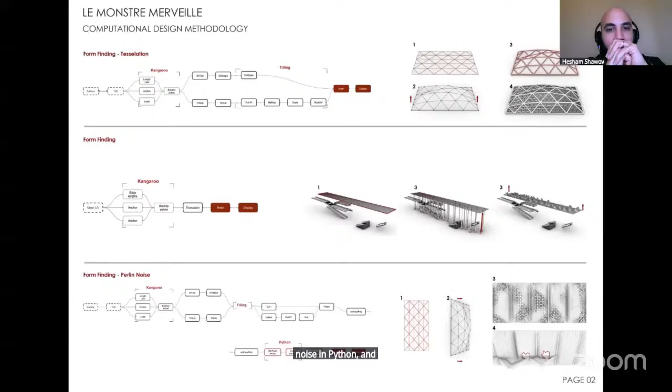And the separator area followed the same architecture as the central roof system, with the difference of the final tiling approach created using Perlin noise in Python, followed by a cull pattern based on certain points to create sort of gates to the balconies.

From there, the process consists of creating the central roof lighting system, followed by the separator to create a wrap inside the project, then adding the multi-level side circulation, on which the light wells are defined. And finally, I have the market functions and landscaping.

For the form iteration, I worked on the roof skin by playing with the parameter of move, then the length line to control the deformation of the surface, then the trisub to control the density of the pattern, and finally scale with the domain that defines the void in each pattern.

While for the separator skin, I have the scale that controls the size of the noise pattern, octaves that control the complexity of the noise, the time for the animation or evolution of the noise. In other ways, it changed the overall texture of the element. And finally, the start and end, which define output value for the easing function.

In this section here, it shows how the project is working together from architecture and computational view, where every area is interacting with the other. The project creates a sequence of light, shadow, and movement.

Moving to the plan division that followed the same spirit of triangulated shape, with greenery, water element, markets, and the central maze circulation, while the side circulation, which is the place for the artwork market, is located on several levels with small balconies that penetrate the separator skin.

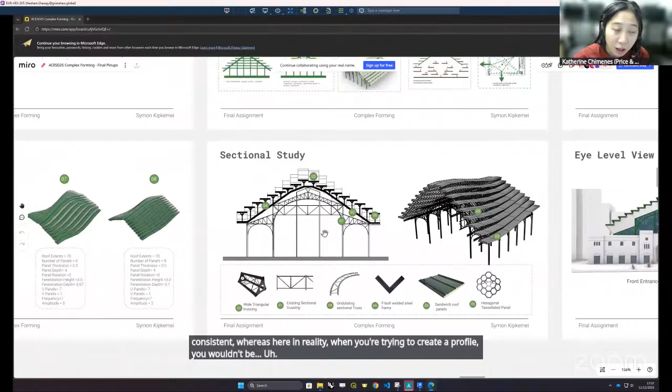But it's just about how you would factor that in, so you can have additional steel posts to vary the height, and then the new skin you've proposed would work quite well with the new imposed structure. You're not varying that much as well. The loads are applied, so that's actually quite a neat solution. And I like the way that you've developed the shape. I think it's light touch, elegant, and does the job. And I like your iterations as well with the geometry. So it's a good idea and good work.

For the next one, what I struggled with a bit is materiality. I think we're lacking a bit of images. The concept is clear, but maybe it could be conveyed more with more views and perspectives and a stronger narrative as to how to achieve the ideas. So there is some kind of loose idea behind it, but it would be nice to actually have more substance to be able to support that concept to make it buildable and feasible.

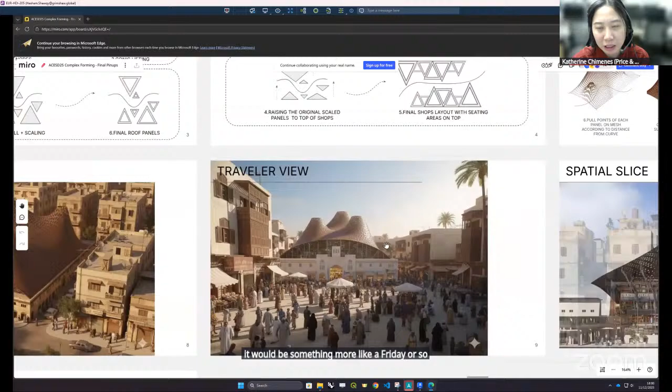You can see that the perforations, if you're looking at using a tensile fabric, having such big holes, and especially the holes having sharp corners, it's an engineer's worst nightmare because you're pulling on a fabric with sharp corners, which will create lots of stress concentrations, and that would essentially tear. So maybe you're trying to create the perforations, but it would be something more like a Frei Otto kind of timber diagram type approach, and then think of having a fabric that has translucent and solid opaque facets that would create that translucency and transparency.

I think it's a very good idea, and I think also that the structure that you've given, the frame for the faceting, is something that would be a sensible approach. I'm less sure as to how we would make the vertical panels work because we're working against gravity here, so it would have to be some kind of more solid, inherently rigid frame.

So maybe some polycarbonate shell or something different. But I think all of these projects require some development in terms of materiality to make sure that what you're designing works well and marries well with the appropriate material.

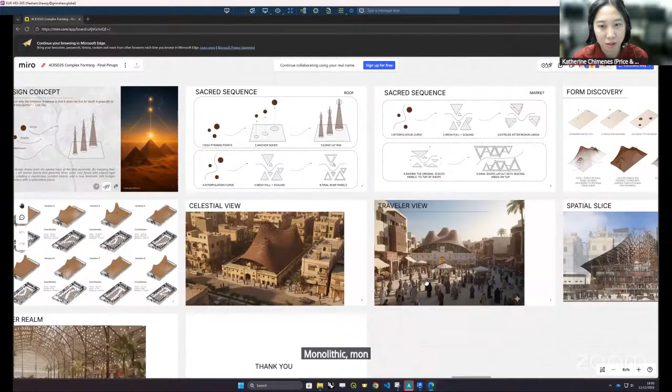Thank you for your input, by the way. Anuj? Yomna, please. Yeah, go ahead. I'm gonna keep it short and sweet because I have a meeting that started a few minutes ago.

So this comment is basically inspired by Simon and Rami's projects. I love the iterations experimenting with paneling, because that's what parametric and computational design is all about. However, I have a comment that applies to everyone: when you're iterating, it's nice to have some sort of constraint or something you want to achieve. Because you could iterate a million times and still not achieve something if you're looking for the form. And form is subjective. You may change your mind tomorrow even.

But if you have a specific constraint or objective, then it could be more applicable. So if in Simon's proposal it was to optimize light, maybe he should have tried every possible thing that optimizes light, and then we could look at it.

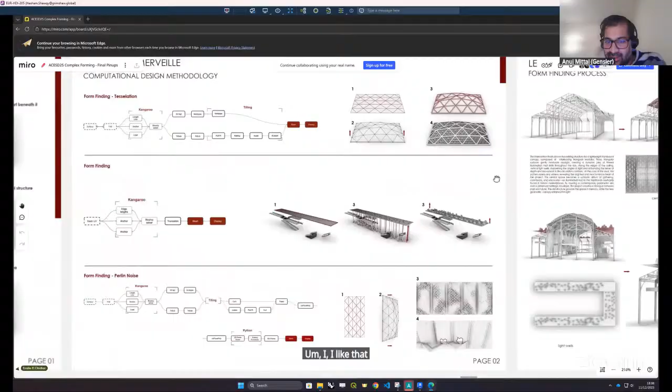And Rami's, I like that you're looking at light, both from daylighting and also how you're showing the night view outside perspective and how the light from inside is going to affect the outside, like the neighboring buildings. I find that quite interesting. And I also like the micro patterns that you're creating on the roof itself.

I just have a slight comment: what I don't understand is probably the side curtains that you're doing. I feel like in your renders they're kind of clashing with the structure. I don't know if you thought about that or if there are any further thoughts behind that, but maybe that's something that could be thought through a little bit more.

And with the second project, Zainab, I understand that there was less time, but I really feel that the ideas could be communicated slightly more and explained slightly better. The overall concept, or at least the start of the concept, was strong, but it probably could have been developed a bit more, I guess.

Thanks. Hisham, I also have another meeting which I'm actually running, so I might drop off after this. Thanks so much for your time, sorry. Anuj, yes, thanks. Again, feel free to check the other projects and leave comments for the students so they feel like you've also reviewed their work. Thanks so much for your time, and sorry for running over time again. Okay, going to Ines or Andre.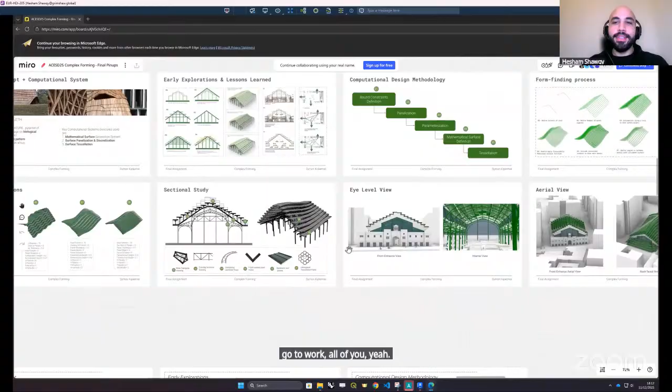Thanks, Ines. Yeah, I was just dying to basically explore a different connection with the existing structure, especially at both the ending and the start points, because I think here this could have been improved a little bit. But yeah, I couldn't agree more with what you said. Andre?

Yeah, very interesting project. I'll start with Simon's also. The moment you showed the timber shingles and organic, I was like, oh my God, because the absolute worst job for any builder or a carpenter or a fabricator is to do a million types of different shingles and try to rationalize this. You then went on to explain your logic, which I actually really appreciated. And I like your form iterations. My favorite one is actually first and second.

I'd like to learn a bit more about the statistics that you're showing, like what the frequency means in this case, and the amplitude. I'm a bit confused about those, but perhaps we shouldn't spend too much time on this. I also really appreciate that you showed the sectional study and you provided us some trussing ideas that you have here. My slight thing is that I feel, and this is more of a design choice, there's no right or wrong, but

you're breaking this into an interesting geometry on the sides, but the front and the back feel very static compared to the sort of organic feel that you're trying to provide with the front. And I see on your back facade view that you have some sort of layering on the back, but it just doesn't seem to connect as much. The ratio of excitement on the sides versus the front, but that's just a designer thing.

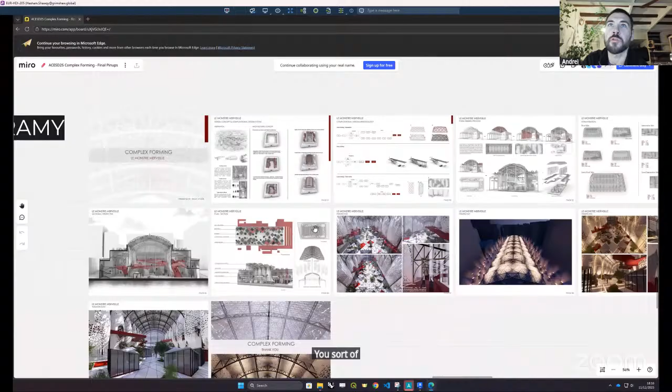And I feel that's a bit of a shame to drift from the initial context, but that's also not exactly the point here. The computational exploration here is quite interesting, and I like that you balance the triangulation as a theme from trusses to the paneling. Yeah, and also how you work with the concave forms.

We must be quite over time. Apologies for that. Amazing, Andre. No, thank you so much. Okay, let's move to the last group. And thanks so much to Andre, Ines, and Catherine for staying that long. Okay, Angie, up to you. Yep. Angie, please, if we have any video that's exceeding 4 minutes, we can maybe speed up or just cut the video at a certain point. So let's keep an eye on the last batch. Okay, no problem. Thanks.

So here we see this set of images. It's the Warsaw Museum, and it was my actual inspiration. And the idea was to create a soft inflatable mesh using pressure with Kangaroo that would blend into the existing market of Bab al-Louk, adding a soft and playful touch while conserving the initial structure. So I created a set of curves along my roof and then used the edges as anchor points. And using pressure, I created my actual mesh.

So I wanted to add to it this motif. So I did mesh strips, diagonalized, and then I added these horizontal lines to have this diamond-like shape. And then I created my mesh with Weaverbird mesh from lines. And here I wanted to have continuity from the roof to the actual ground. So I projected the same curves as circles, scaled them, ruled surface, and then I did the same mesh simulation and added the same pattern as well. So here we see the result.

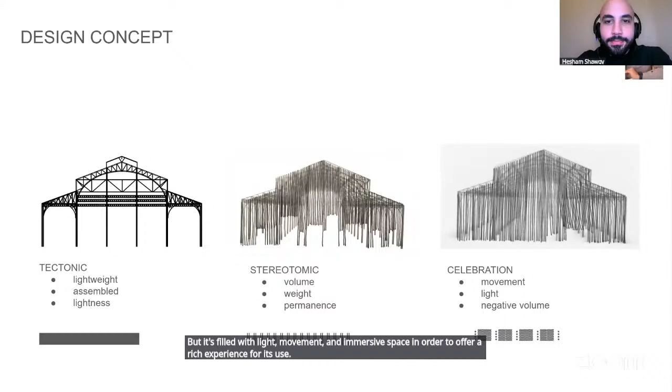The workflow starts with filling the center nave with voxels. Then the volumes of the existing shops are used to cull the voxels. In this way, the negative space of the shops remains as a memory in the market. Filling up the space with voxels means that the primary circulation is pushed to the perimeter of the building in the side wings, which later becomes the logical place to introduce a new space for shops.

Since the main space is very rigidly organized by the voxel grid, which is completely orthogonal, the movement induced inside could be completely free, dynamic, and chaotic, another element that celebrates its rigid orthogonality with its opposite. The roof is tessellated with inverted pyramids to filter the sun rays inside. Those pyramids are additionally scaled with Perlin noise factors to introduce more dynamic in the sun rays filtration.

The sun rays on the 22nd of February, as in the Abu Simbel solar event, are used to guide the coloring of the voxels inside. On the inside, the new structure is light but intense, but on the outside, it has no presence in the surrounding.

In the Grasshopper workflow, the inputs were geometries from the market directly in Rhino and the sun rays from Ladybug. First, the tessellation of the roof was done by creating a set of surfaces that got scaled by the Perlin noise factors. In parallel, the main space was filled with voxels and tested with points for the volumes of the shops. The mesh was colored by calculating the distances from the center of the voxels towards the sum of the vectors for the sun rays, and those distances were used to guide the gradient coloring. Orange was used to symbolize the desert and blue for the sea.

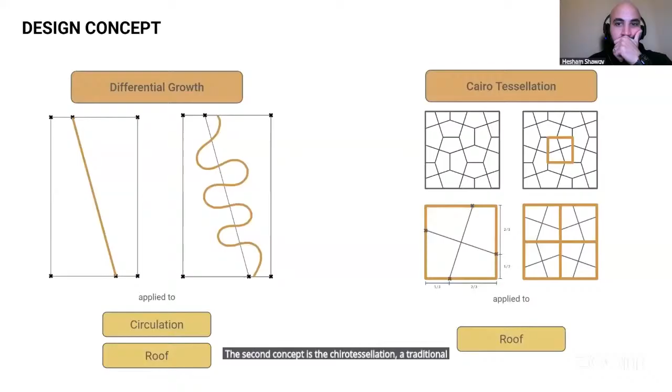The second concept is the Cairo tessellation, a traditional paving pattern widely used in the city, and this pattern was rebuilt parametrically, starting from a square and then mirroring it, and is applied to the roof surface. The circulation layout is defined starting from the rectangle based on the existing steel structure. The lines are traced to connect the main pedestrian flows from the four entrances of the building and along the principal axis.

These lines were then discretized and processed through dynamic relaxation using Kangaroo, generating smooth polylines through simulated sphere collisions. By offsetting these curves, the main paths of the market are created, and two of these paths were vertically displaced to form ramps leading to the first floor, creating spaces for storage and stores beneath the sloped path.

By changing the parameters of the line length and the circle radius, it was possible to explore different amplitudes and frequencies of the curves, and the final result allows to find paths that elegantly avoid the existing structures with fluid movement.

For the roof geometry, the process started from a flat mesh onto which the Cairo tessellation is applied, and the frame size of the pattern can vary. To give more dynamism to the surface, the mesh vertices can move vertically, and these variations are driven by a heat map based on the proximity to the main path. In this way, areas closer to the circulation zones have the minimum frame size and receive more deformation.

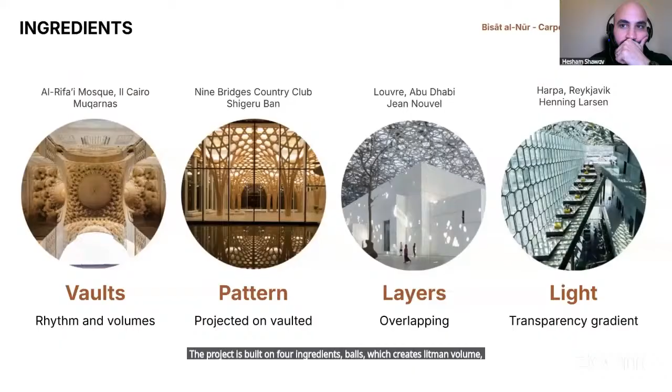My name is Elena Corio. This is Bisat al-Nur, which means carpet of light, my proposal for reviving Bab al-Louk market in Cairo. The project is built on 4 ingredients: vaults, which create rhythm and volume, patterns applied to the vaults, overlapping layers, and light. Light is the main protagonist of the project.

The design is composed of 4 layers: a new interior layout, a timber shell, the existing steel structure, and a new exterior roof. The diagram shows the workflow with color coding for each part. In gray are the constraints that guided the form-finding process: the existing steel structure, entrances, and roof base. Kangaroo plugin was used for dynamic relaxation and Ladybug for solar irradiation analysis.

Different methods and patterns were applied for tessellation of interior and exterior layer. I will now illustrate the steps. The interior begins with a new exhibition space. Circulation paths connect the main entrances with the elevated area. Multi-level stores are organized along the central axis.

The timber shell starts from an initial mesh and anchor points. Through dynamic relaxation, a funicular form is obtained. Faces of the mesh are then culled to define the main module, which is repeated across the market. Different curvatures emerge depending on mesh size and load factor.

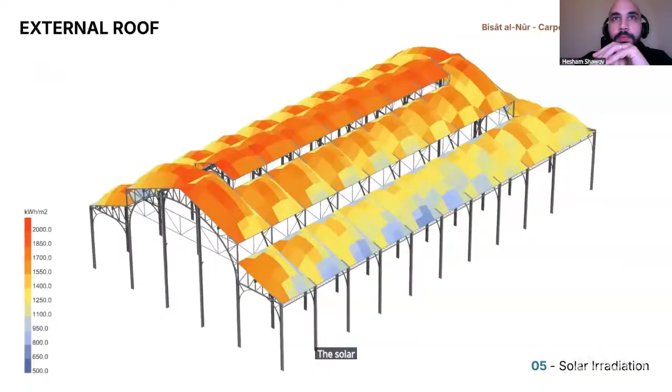For the exterior roof, base meshes are created for each bay. Mesh relaxation is applied again, and tessellation is achieved with Box Morph, repeating square tiles across the roof. The solar irradiance analysis informs the grouping of panels into 3 types: high exposure, low transparency; medium exposure, medium transparency; low exposure, high transparency.

The final outputs include plan views of the different levels, cross-sections along the 2 axes, interior views showing the shop layouts, and an exterior view.

Thanks for your attention. Hi everyone, it's Mahmoud and I'm happy to present to you my final project. The name of my project is G2 Skin, which touches the color tones of Egypt's DNA. We'll come to this terminology later.

Next, having a look at the history of Egypt and how this history is rich with a huge diversity of tools and arts and also monuments. So this could be a huge source of inspiration to this project, especially as the project represents a historical place. We'll start by site analysis and see the existing building, some photos, and also the conditions regarding the heat, radiation, and some analysis for the project.

And we found that the project, due to the design of the roof itself, gained a huge amount of heat radiation through the year. So we started to think about how to manipulate this roof while keeping the existing structure. We can see in the diagram underneath here, we start to crack or manipulate the roof to respect the sun path, to prevent the radiation and allow for the north light.

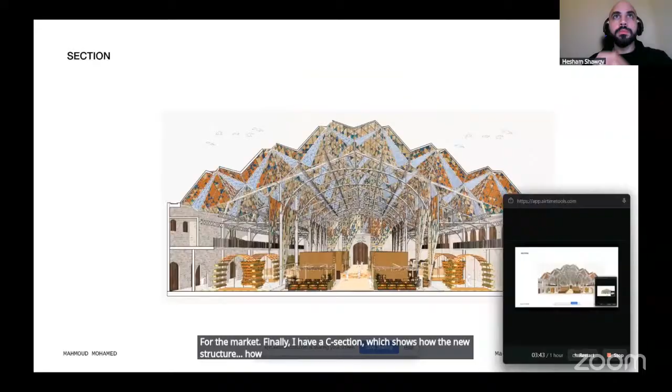Finally, I have this section which shows how the new structure and the roof, although it's a little bit complex, are still respecting the existing roof, by adding a sub layer to maintain the historical roof as was required by the brief.

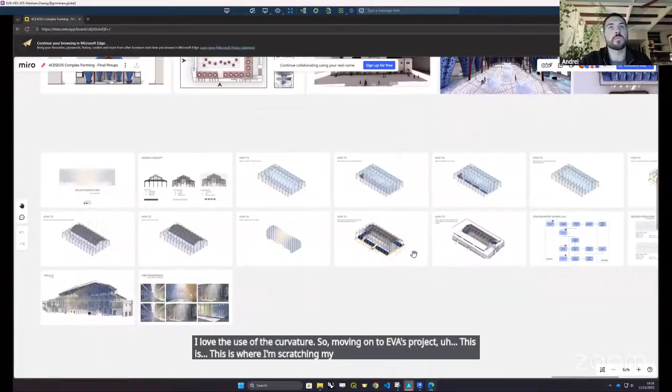So moving on to Eva's project, this is where I'm scratching my head a little bit, because you talk about lightness and movement. If this is interior and you don't have any wind, there's no movement. And if there is movement from the wind, this might actually cause issues. I remember I had something similar where I was designing heavy curtains flowing with the wind, and I dropped the design when I realized they would disrupt the flow of people. It would be a bit annoying to be hit with a curtain in the face, or in your case, a rope or whatever is hanging down.

I wonder what kind of material you were thinking about, but this is just something to consider. You're basically taking away a lot of volume of the interior space, which is counterproductive to what the market would be as a structure, especially since the truss and the roofing so far have made it so that you can have all this central space without any pillars taking up the space. So you have this large volume that feels grand, and here it feels like you're taking that away.

But anyways, moving on to Andrea's project. What I really appreciate about this is that you designed the roof based on the flow of the people. And I like how the paths that you generated with the differential growth drive the roof shape. I think that's an interesting design process and form-finding approach in general to begin with.

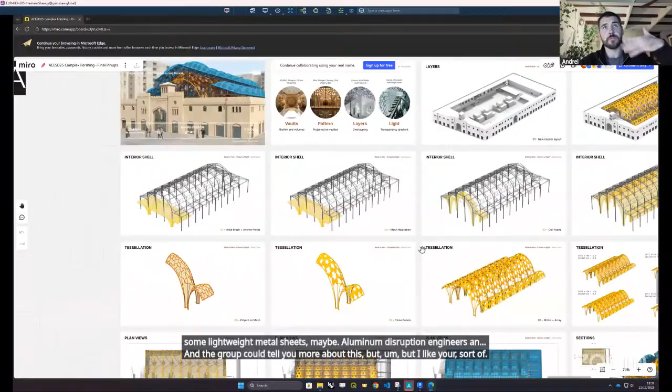It seems easier, or more manageable rather, to do it with some lightweight metal sheets, maybe aluminum. The structural engineers in the group could tell you more about this. But I like your idea of using two layers, your timber shell and then the roofing, the blue roof. I also wonder how necessary that is, but that's also a different question.

And am I leaving someone before going to Mahmoud? Fifth project, yeah. No. Mahmoud, I really liked your project, and also I appreciate the fact that you used Wallacei. I think that's one of the most important tools that we can teach in complex forming. The use of multi-objective optimization is so important, and here you're tackling good points from lighting to, well, I think it was. Were you focusing on anything else besides lighting, besides solar and the optimization? Was there any other fitness objective? Well, regardless. Yeah, I'm sharing the slide for the parametric methodology.

Yeah, so nice. And I like that you repeat the geometry, because again, this is what makes it much more buildable and much easier to approach from any building perspective. It looks beautiful. I like your choice of color actually, and I like your idea of maintaining. I've seen triangles basically in all of these projects, I think, which works great, especially in much of Islamic architecture. You see a lot of triangles, even from the truss systems that you have here. So I think it's great. I really like this project.

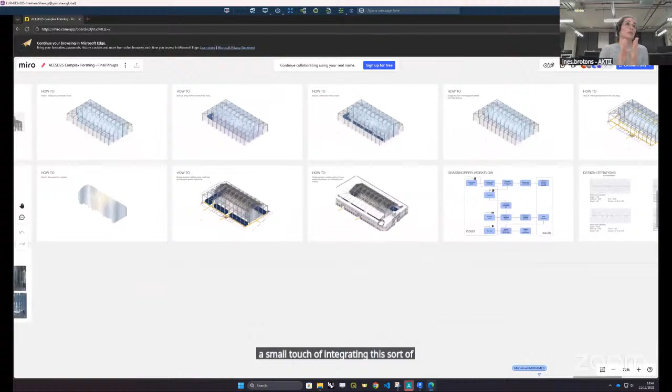Then, moving to the second one, I found it a project that is more poetic in a way. It may not be answering the question of the functionality of a market, but I would imagine it more as a space, an exposition space or something that could lead to different other functions. Something that was explained that I liked quite a lot is doing a very small touch of integrating, I don't know the materiality here, but cloths or strips along the grid that will force the circulation to work in the way you think is best for the purpose. So with this slight touch, you are generating this circulation, and I think that's architecturally very powerful.

Then moving to Andrea's one. I agree totally with Andrei. It's great to see the circulation and the crowds of people on the pathways being reflected in the roof. Also, when I saw the Cairo pattern, this is the perfect project to apply a Cairo pattern. Projecting the Cairo pattern on all the surfaces that are flat or inclined, so flat as well, would be great, because on top of what Andrei was saying about fabrication, cost and buildability, it's crazy to think that you can build it up from a single tile, at least the cladding or the final layer of the roof.

It's true that in some of the areas this is not happening, but it's always the compromise between free form and standardization. So I think in this project, in some areas it will be possible to have a very standard, unique piece, and in other areas maybe a bit more control. It will be something more bespoke.

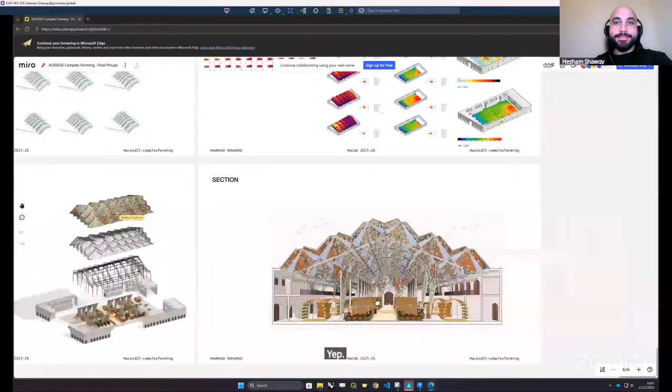Okay. So Hala, following Andrei's comments and everyone's comments, I think it's very doable. It's one of the ones where you look at it and think, okay. From all the projects we've seen so far, there are different degrees of how realistic the proposals are, and it's fine if you can use these tools to create cool visuals, but the reality is to be able to design something that has an effect on people at the real-world scale.

So scale is one big thing, and secondly as well, fabrication buildability. How does it translate into real life? So being able to see your work and then be able to translate that into something real is a very good way of gauging how far to push your work and what you need to do to get it to that point. So I think this is quite a good example.

Eva's one, I think, following Ines's comments about how poetic it is, I think initially I wasn't sure about where this was taking me until I saw actually the renders. And I think it's very interesting because in a way you're really showing how it's quite clever actually, the notion that you applied a vertical element of translucent material to deal with light, because light very rarely comes down perfectly vertically. We sometimes forget about that, and I think it's very creative and imaginative to tackle it that way. It's very subtle, but also structurally, it's very easy to implement.

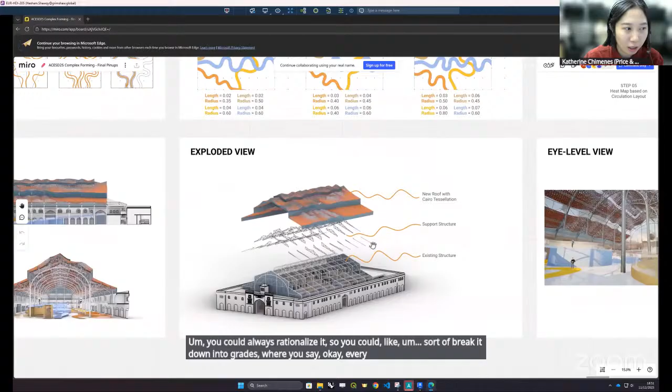And also talking about how every panel is different, and that sort of customization of the shapes. You could always rationalize it. So you could sort of break it down into grades where you say, okay, every panel is half a meter by half a meter or a meter by a meter, and just say, okay, we're going to.

Oops, sorry. You're back now. Don't worry. Am I back? I froze again. Yes, you're back now. Hello. Yeah, I'm back. Hello, test. Okay, yes, sorry, we hear you. My signal is dying. I don't know why.

Okay, so I was saying there could be a thing where you just rationalize it into larger panels and say, okay, we'll just have 4 or 5 types, and then you will vary those and still manage to find some way to replicate that kind of pattern, but by reducing it to units, discretized like half a meter or 1 meter units.

Yes, and then Mahmoud's piece. I think that I really liked it. I think the storytelling of your boards, the way you have explained your rationale as to how you've developed the shape, the parametric optioneering is very clever. It feels like you're not just doing something for the sake of doing it. It's backed up by the purpose, the brief, how you're trying to make your design make sense for its purpose, and not just adding something for the sake of adding it.